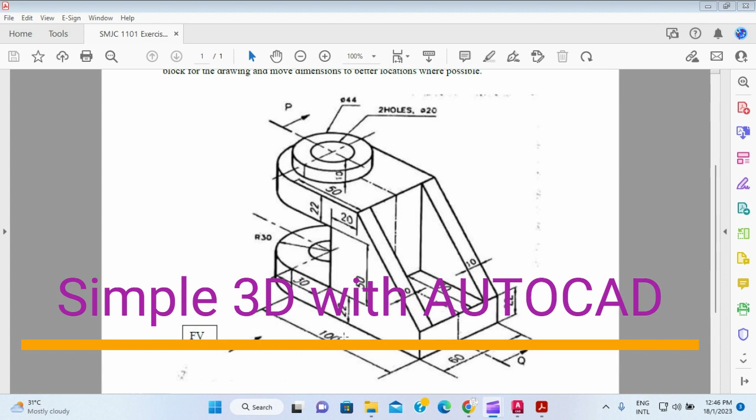Okay, in this video, we will try to draw this object from this side. So I will start with the bottom part, slowly moving up and finish at the top. First we want to draw the circle with radius 30, and then we will draw the back part, which is about 100 in terms of unit.

When we start a new drawing, we can choose the ISO 3D template to draw. Normally I will move the icon to a side so that it will not disturb us. So what I do, I just put UCS, put the UCS icon, and put it under no origin. Okay, so it's out of the way.

From here, I will choose southwest. So you can see here, this is the top view, this is the left view, and this is the front view. If you look at the diagram, this should be the left view, this should be the front view, and this should be the top view.

But you can actually change it to a different orientation if you want, what I call this southeast. So this will be the front view, left view, and the top view, which is exactly like what is written here. Then we will move according to this. Since the front view is written here, we will see the front view from here.

So first, we work from the bottom, and the first thing that we're going to draw is this section here, a circle with the radius of 30.

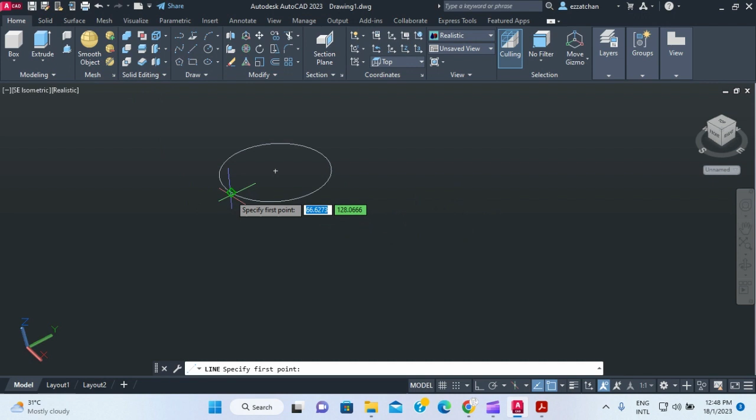So we can just look at it from the top, and then maybe it's too big. So we move it at the top, and now we can draw from the quadrant and go to a unit of 100. Okay, and then we move aside for 60 because the radius is 30 just now, and enter, and then we go back to the quadrant.

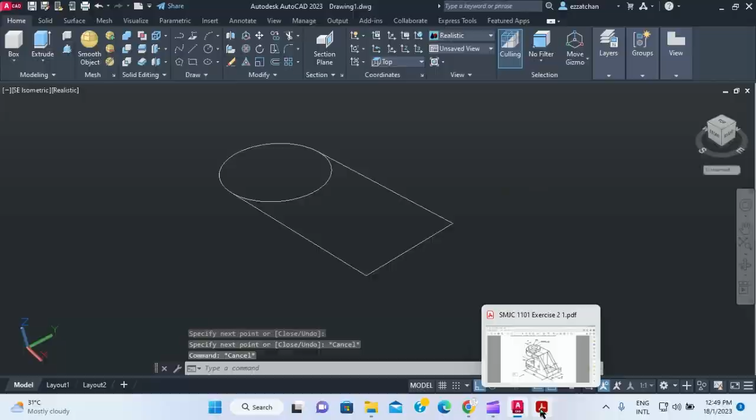So this is the bottom part which we have actually completed just now, which is here is 100 from the quadrant, and this is 60, and then going back there.

So now I just trim this section so that it's not there anymore. So if we can join all this together as one, and then we can just extrude to a unit of 22.

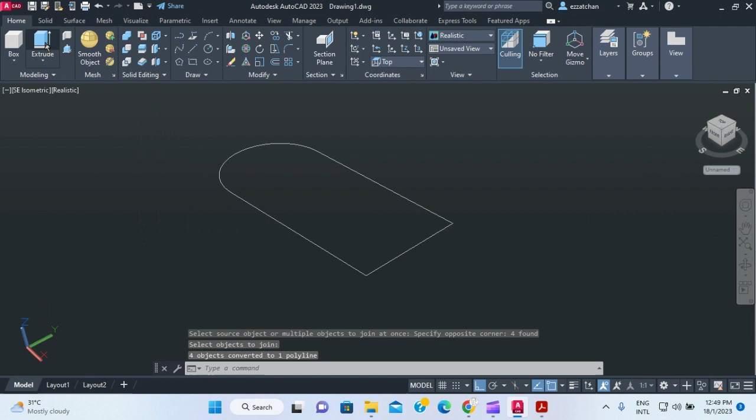So we can extrude to a unit of 22. We extrude and select the object that we want to extrude, enter, and go up to a unit of 22. And enter.

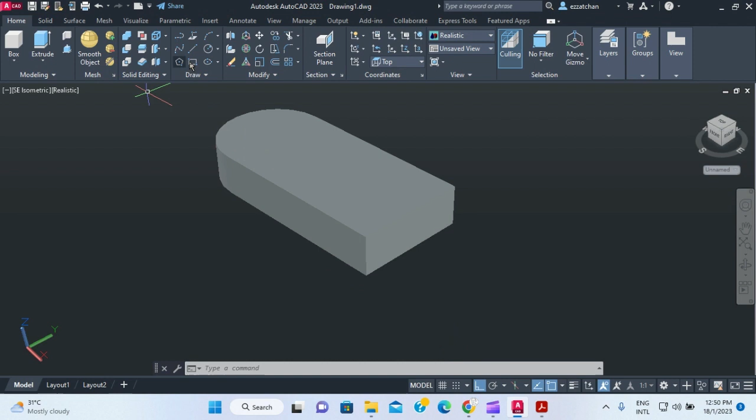Okay, so we have completed the part, and we need to draw another circle with a diameter of 20 in the middle here with the same center here. So we need to make a hole. We will draw a circle from the center here, the diameter is 20. So for diameter, I put D and 20, and then we put enter.

All right, so now I'm going to use press pull to actually make a hole. So I will choose this one, and I'll bring it all down. So it's done, the part is done.

All right, so once you got that completed, it's now time to do this. So from the middle here, you need to move 30 units and 50 units to the top. So 30 unit and 50 unit to the top. So you can actually do that - the first line, and then after that, this is another 20. So 30, move up 50, and then move 20.

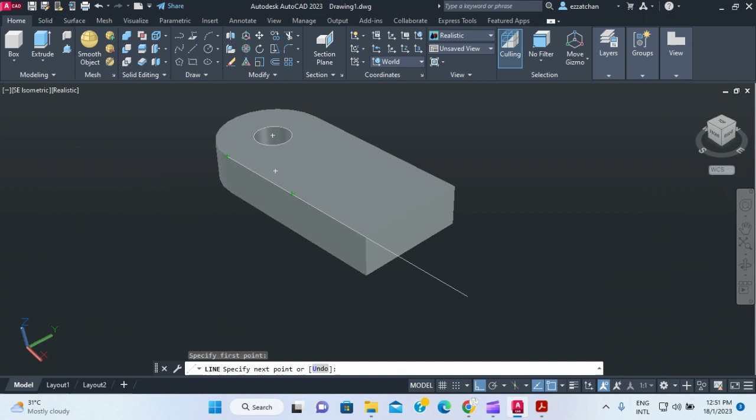So what we're going to do, we will draw a line from the end point here. We move just now, what was the distance again? 30. So we go 30, and then we move up to a distance of 50, and then we move down to a distance of 20. So to a distance of 20, and then we move down to a distance of 50, and then we go to the end.

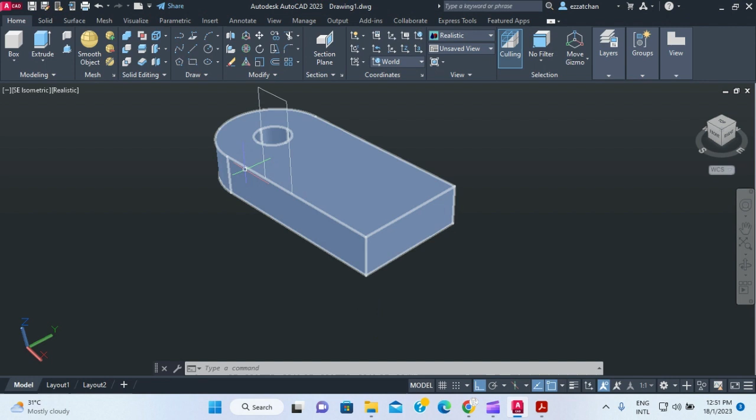All right, so that is the part which we have drawn here. So this is the section that we have drawn. So now we need to extrude to the other side. So what we do, we delete this line - sorry, this line which is not needed anymore.

Sometimes it's difficult to see, so you can change it to 2D wire, and from here you can delete the line. So what I call this now, you just move it further down, and you join all the lines so that you can extrude to the other side.

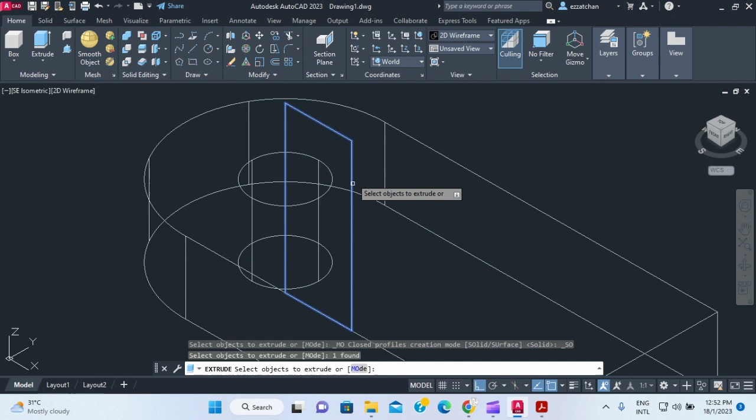So you join this line, this one, and the last one, this one, and you just put enter. So you see the four lines have been converted into a 3D polyline. So you just extrude this one, enter, and put it all the way to 60. So you are done with that part.

So if it's not clear, you can change back to this. So you can see what we have drawn just now is this part. So 50 is done, 20 here is done.

Okay, now from here, we need to draw - from here the end to here is 50. So for the center line, we will draw a center line there, and then we should start drawing this circle of diameter 44.

This circle, and then the others, this is still 60, so this should be 30. So this one diameter 44, and this is the one at the top that we do later.

So what we need to do first is go the distance of 50 from the end here to the center line. So we're going to draw a line from the corner here, go a distance of 50, and then move a distance of 30. It's the radius. Okay, and we put enter.

So from here, you can draw a circle with a diameter of 30, with a radius of 30, sorry.

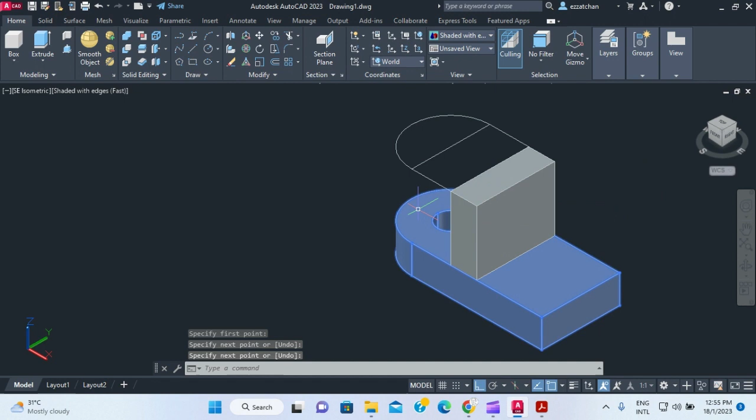So I will join the line first. I will join this and this line, as well as this line, as well as this line. So now they are all joined.

So I can just extrude this part, going up a distance of 22. Okay, so I press enter. So I'm done with the top part.

So what I need now is the structure at the top. The structure from the top, this will be 30, and again the same 50 here. So I have to draw two circles, one with a diameter of 44 and one with a diameter of 20.

All right, so what I'm going to do is draw from the center line to here, which is 50, and enter. So that will be my center point.

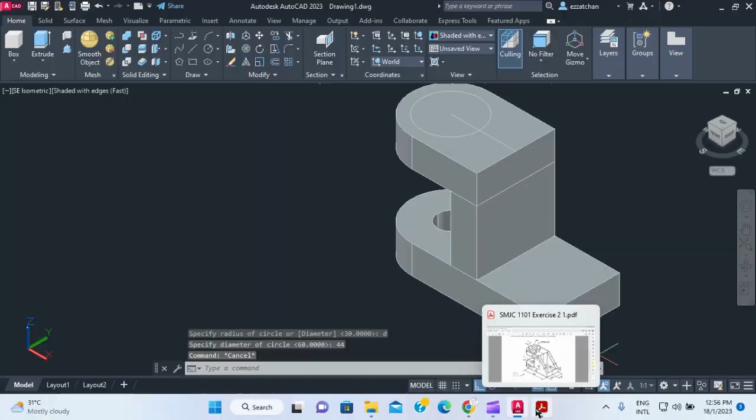And I need to draw a circle from this endpoint with a diameter of 44. So I can choose diameter first, and the diameter is 44. So I put enter. And then I have another circle at the top, which I will draw later.

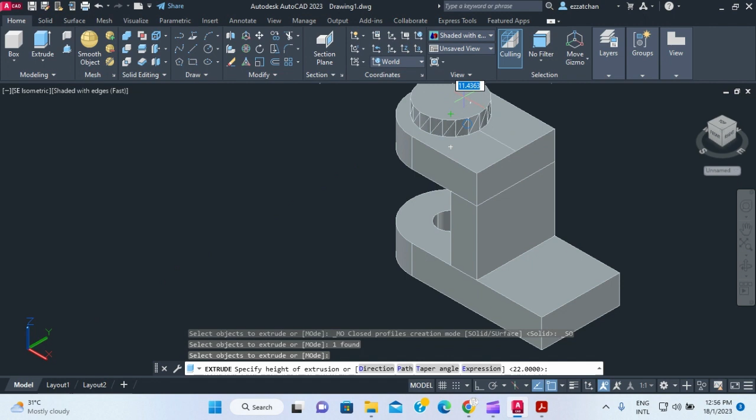This one I will move up to a distance of 10. So I will use extrude, click on this, enter, and go up to a distance of 10.

Now I need to create the hole at the top, which is a diameter of 20. So what I will do is draw a circle from this center, with a diameter of 20.

All right, so this hole needs to go all the way down. To do that, I will combine these two to make them a union, so it goes in one shot. So I'll just put union for this and this, and I put enter.

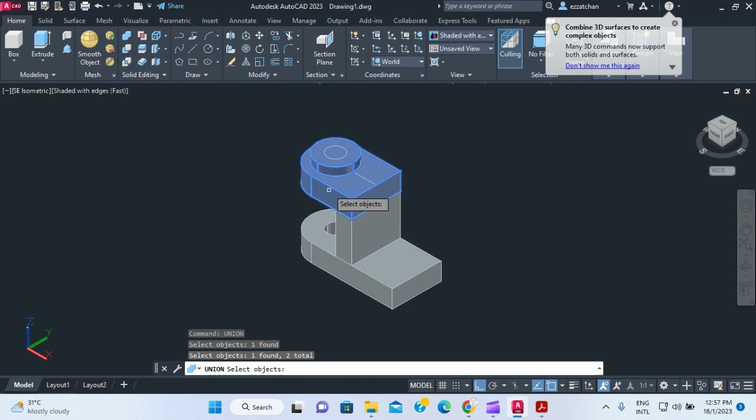So now I use press pull and press it all the way down. So now I have completed that. So that is how the thing looks like at the moment.

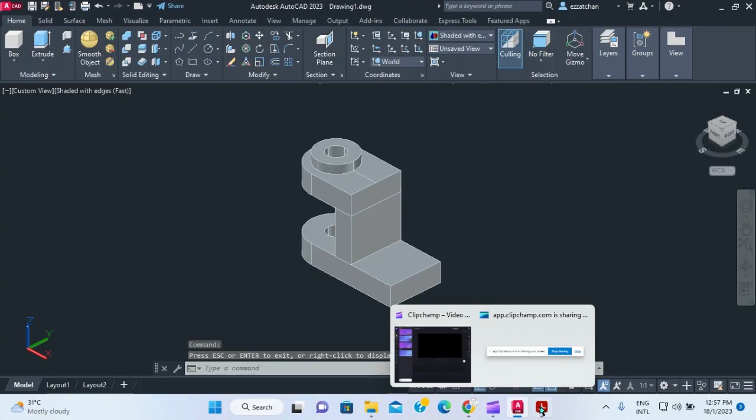All right, so what else is left in this drawing is this part here, which I need to draw from here to the top, and it goes a distance of 10.

So what I need is to draw a line from here to this corner and up to this corner, and coming back here.

Okay, so an easier way to do this is to use polyline, but I forgot to do that, so I just did it this way. Anyway, you can just join it back later.

So you join back the line, this one, and where's the line? You can't see it.

So it's easier to use. I'll just put join, this one and this one. All right, I just enter.

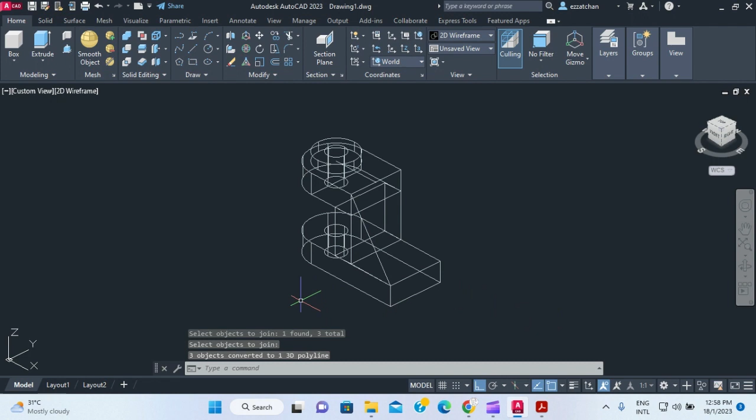So with that, I go back to the shaded edges. I just extrude this one, enter, to a distance of 10. All right, so I'm done with that.

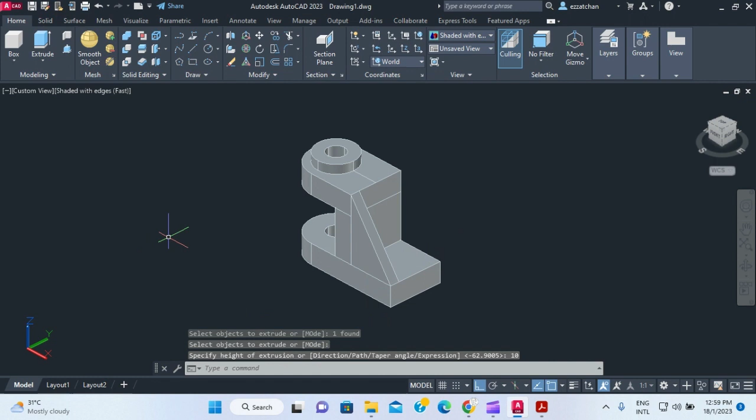So I just need to mirror this one to this side. So what I will do, I will type mirror, enter, and okay, and enter, and the thing should be from the

center point here, and oh, it didn't go that way here. Sorry.

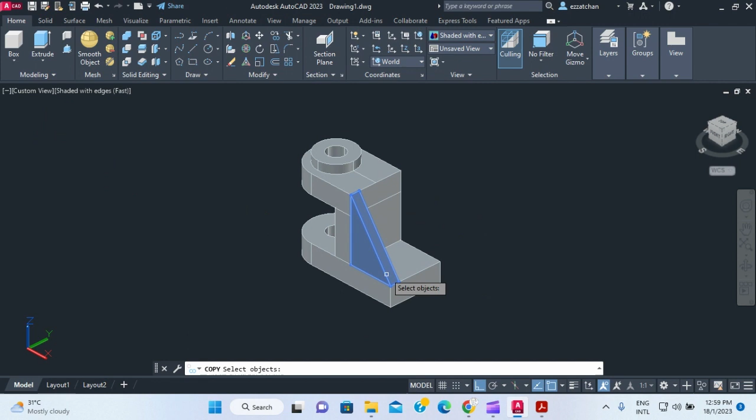Or we can just copy. We can just copy this one, this object, enter, and the base point is here. We just copy it here. All right, so that's done.

All right, so now the object is done exactly like the drawing, and the last bit is to use union to join all the parts together.

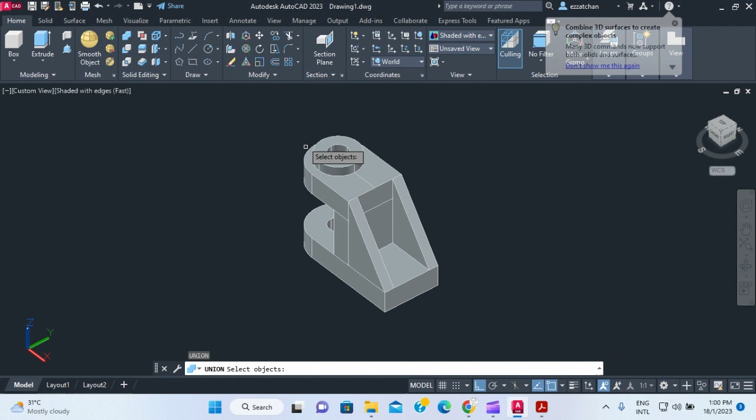So now I'm joining the parts together. Okay, so to delete all the unwanted lines, I can now go for isolate, hide object, and the object we want to hide is this one. These are all the lines which I used to navigate around just now.

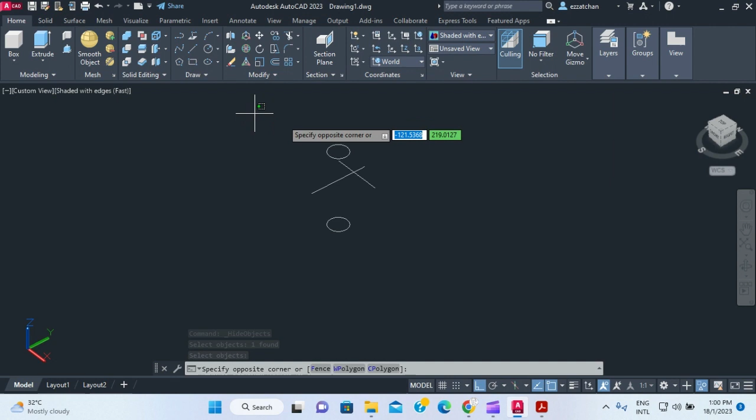So I just highlight and delete, and then I just go back and object isolation. So this is my object.

All right, so if you can turn the object around, and we are done.

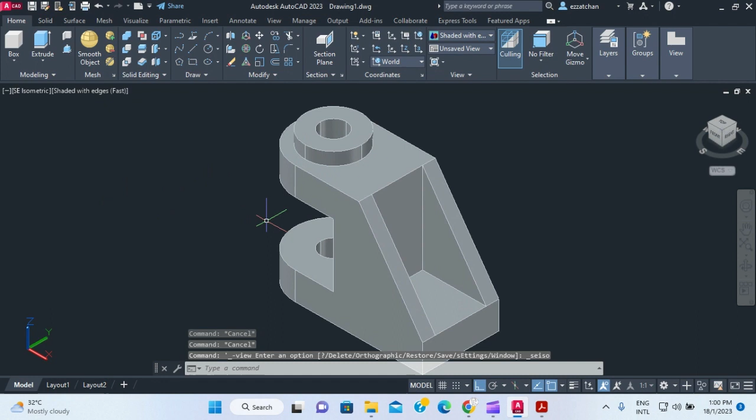So maybe giving it a little bit of color. So we can choose the object, and we provide color for the whole object.

So what we do, we will choose the color. So maybe magenta. All right, and we are done.

All right, that's it for this drawing. This time around, a simple example. All right, thank you for watching.